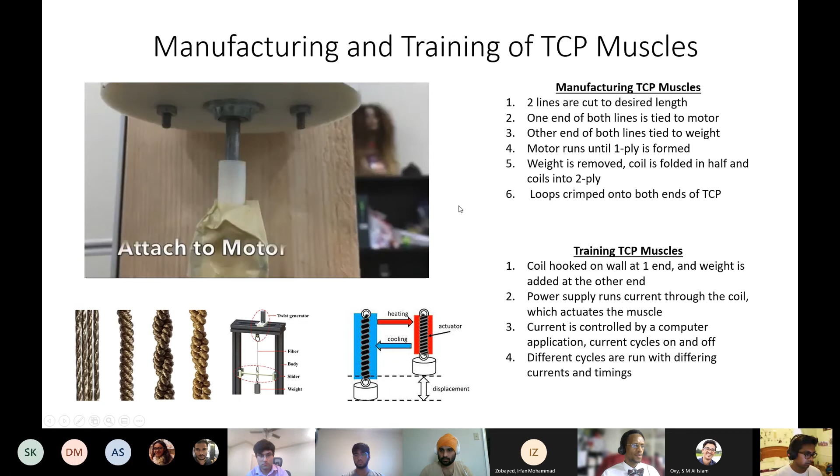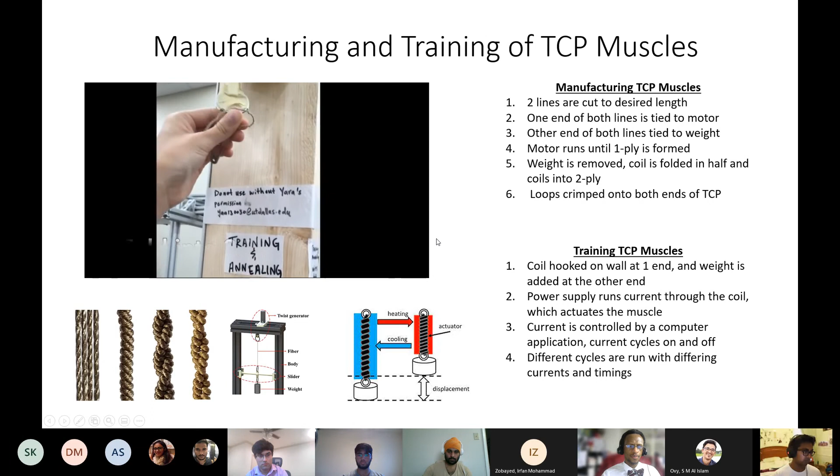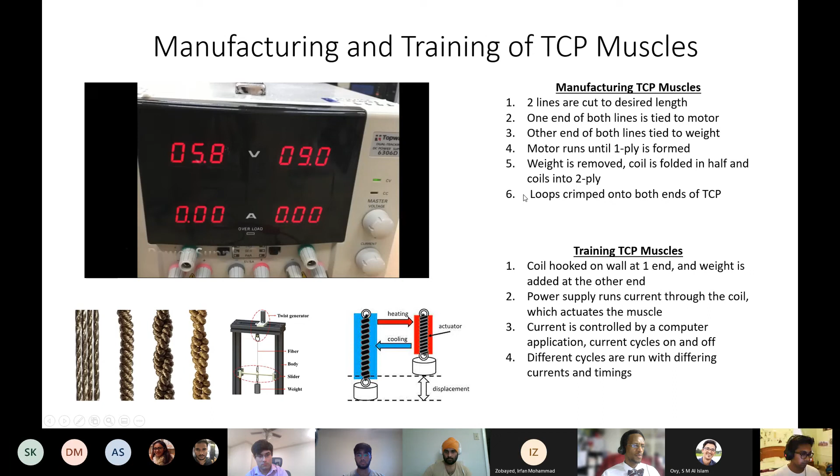So as the motor twists the wire, it makes that one-ply coil, and then here you can see that one ply is made into a two-ply by folding that, and then it is crimped into place. And then this part details the training of the coiled polymer.

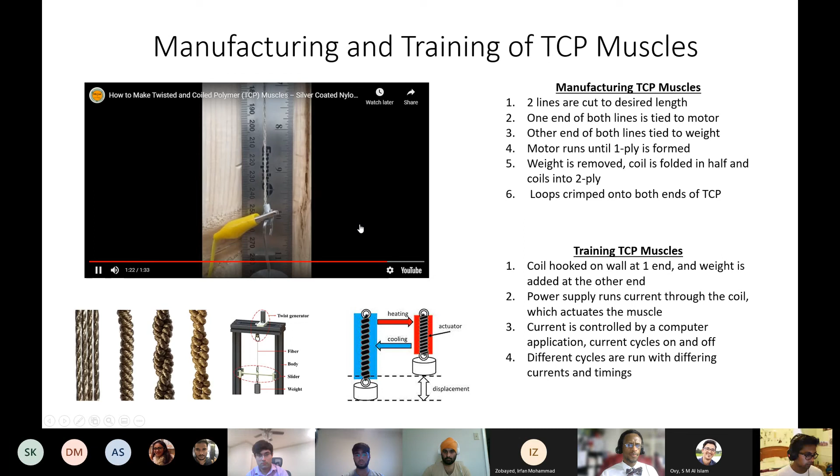And this video uses different voltages and currents, but the setup I'm familiar with used 4 different voltage, current, and timing settings, and that's a major difference from this video. So if that's all, are there any questions for me?

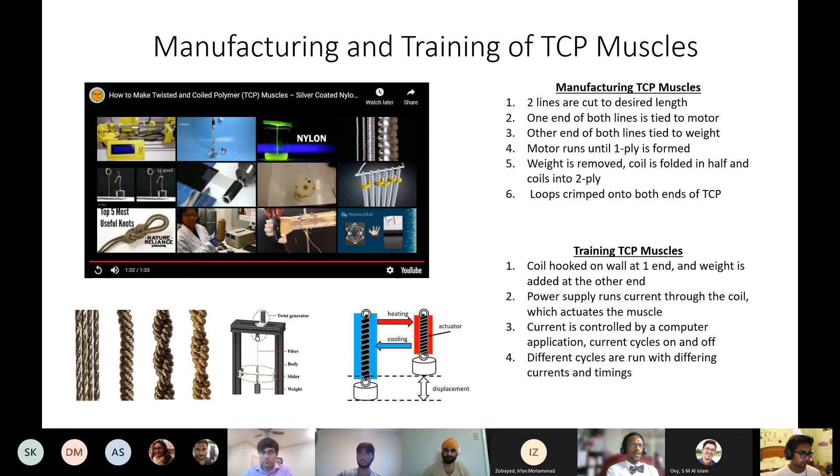What are the applications of TCP muscle apart from the iGrab, which you feel can be done in future? I think that this could be applied to any sort of actuation and replace motors in a lot of different circumstances. So I think it could be used to simulate muscle contraction in maybe prosthetics, for example.

And I think I've seen it used in the underwater robotics division as well. So I think there are a lot of applications to TCP muscles.

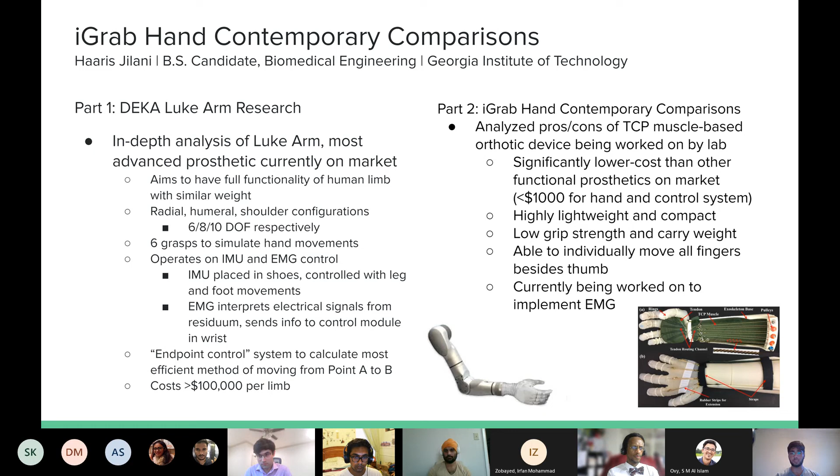And it's currently being worked on to implement EMG. Once this is implemented, the user will essentially be able to control the hand, as it will interpret electrical signals from the arm, and this will contribute to how easily it is able to be used by the user. So overall, the iGrab Hand sacrifices some functionality and power for accessibility and precision, and represents a much easier to access choice for amputees in a market that's often dominated by a couple large companies.

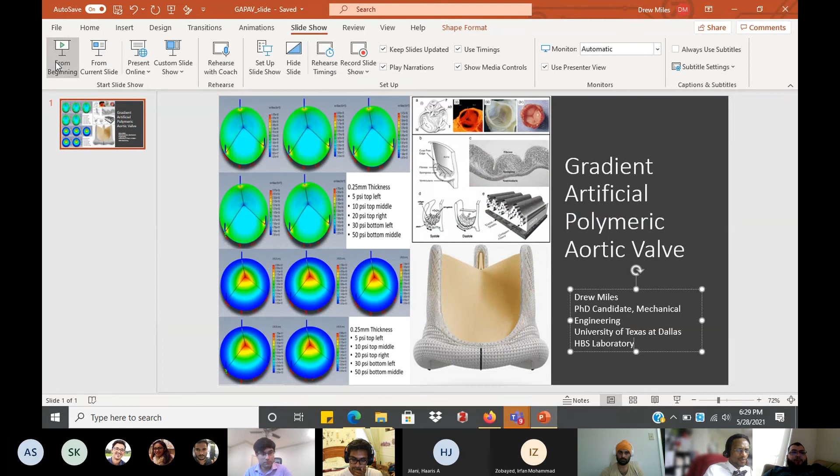So the simulation here, what we're doing is we're trying to determine at what thickness will we have the optimal response to the average pressures found in the human body. So although we went all the way up to 50, even though that never happens—if that happens inside the human body, you're dead—but we did that as a factor of safety.

And we're trying to make sure we want to get the right size of elastomer so that we don't have breakage or tearing of the valve, but that we also have full opening as much as we can get. We want the valves to fully open to not restrict the blood flow through the valve.

So we're tinkering and adjusting the different values to find the sweet spot of thickness, so that we have the correct thickness and correct angle relative to the valve—relative to the outer ring of the valve.

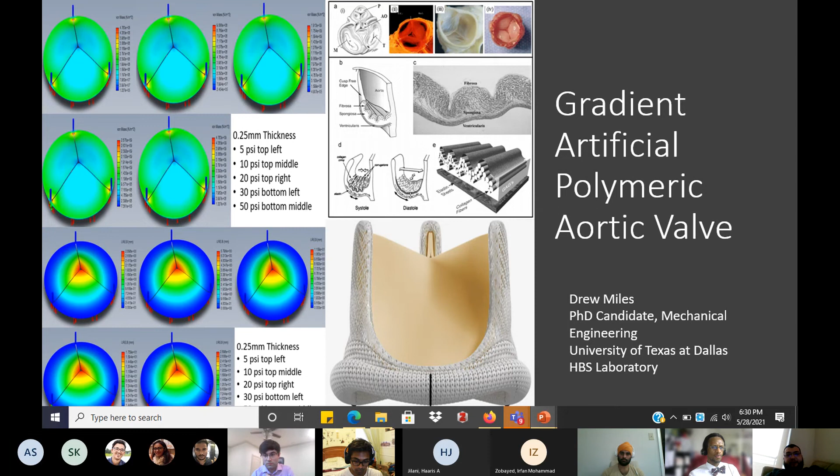Great, thanks. All right, so let's give a hand for applause to Drew. All right, so any questions? Quick question. I have one question.

Drew, what sort of muscles are you trying to use to actuate the valve? And then how much actuation strain optimally are you looking for?

Well, first of all, I don't know what the optimal strain percentage is—I don't remember that offhand. However, the other question I can answer very easily: we're actually not using active actuators, because that would require a power source. Natural valves have no way of manual activation—it's all passive activation due to the pressure differential.

So what we're wanting is just a material that can be trained to respond specifically to certain pressures. We're investigating whether that might be some type of smart material, or just a polymer with certain properties that we've added. It's all being investigated, but at the end of the day, we don't want any kind of actuation that's going to require any kind of power source.

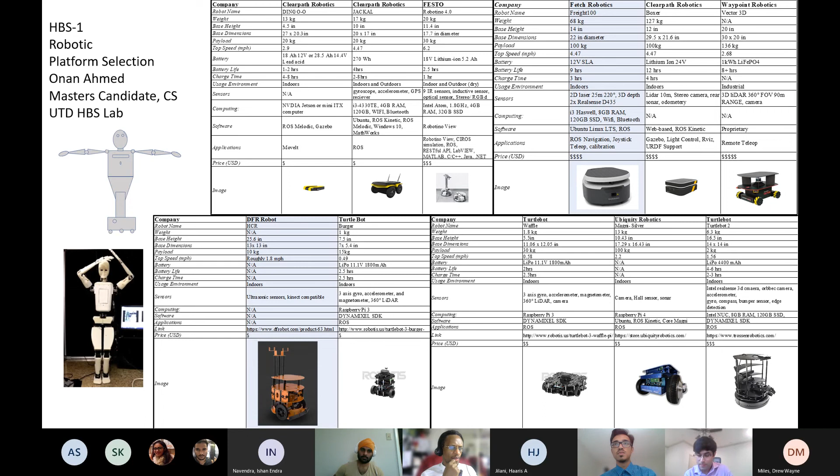Great, thanks, Onan. So let's give it up, let's give the hands for applause and move to the next. Next is Abhishek Singh.

Hello everyone. So I have been working, I'll share my screen first. I'm spotlighting everyone presenting, the presenters, so we'll see them. Can you see them magnified? Presenters? No, sir. Okay, maybe it's only for me. Okay, go ahead.

So I have been working on development of the social assistive robot that Onan also just talked about briefly. Can you make it full screen, please? Is it not full screen yet? Not yet, I think. Is it now? Hold on, not yet. Abhishek, you have to share your screen, I think. You have shared the presentation only, probably. Oh, it is shared, it is shared, but I'll share it again, okay.

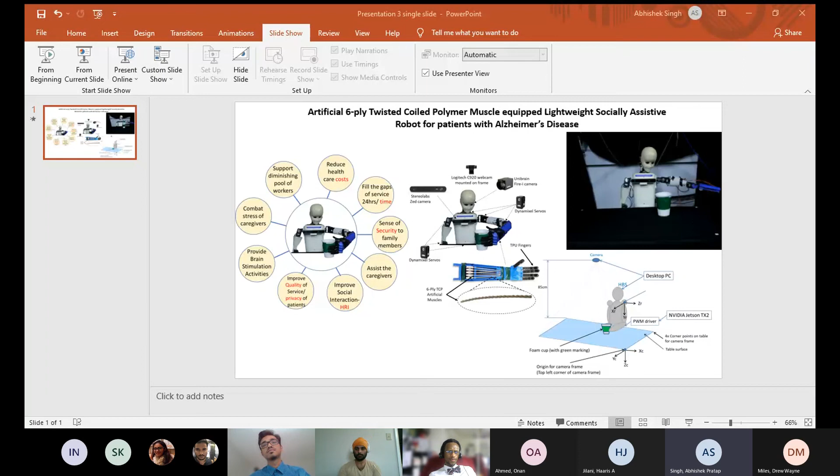So currently, you can see the robot just grabbed the cup from one spot and placed it at a different desired target position. So how this robot works is, currently it uses a traditional computer vision system in which it differentiates red, green, and blue color. So currently in our program, we just painted the cup green, marked as a green object, and then it grabs a picture from the camera mounted on the frame.

It's a Logitech camera, and then it calculates the centroid of that area of the green color, and then tells the robot where the cup is located, and then uses inverse kinematic equations to reach the cup, grab it, and then place it at the desired location.

So currently, the way this is set up is not fully automated. We have to trigger the grabbing action manually using the 6-ply as it is connected to the PWM driver through NVIDIA Jetson. So in the future, our goal is to make it fully automated, use machine learning techniques as well, and make it into a mobile platform, so it is more useful, as Onan had mentioned before. So that's the current situation of this robot.

Great. Okay, a quick question for Abhishek. We've been discussing this at least twice every week to complete this paper. But the application is great. So this Alzheimer, or assisting as a socially assistive robot, SAR. So one thing is that 6-ply, we have one publication on 6-ply for jellyfish, but not for other robotic applications. You guys may have to look at Armita's paper, because that's the only one we have regarding 6-ply publication. I checked yesterday. Yes, sir. All right. Yes, sir. Okay.

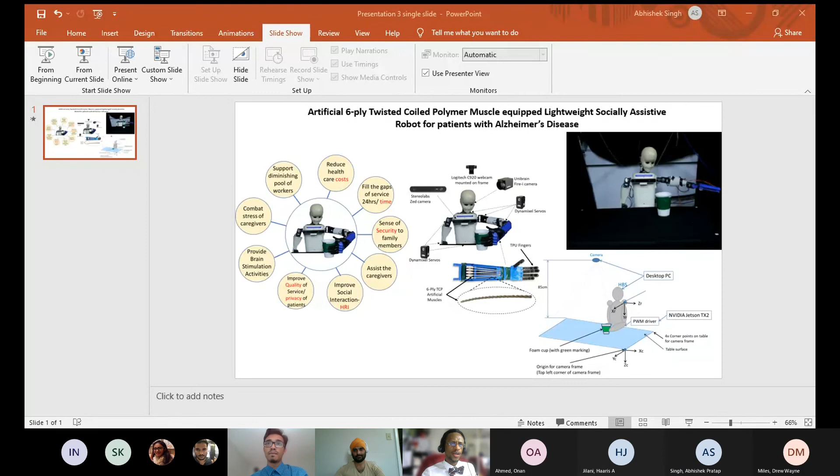So let's go to the next. Let's give an applause to Abhishek. Thank you. And thanks, Abhishek. Let's move to the next. So we have Ovi now.

Let's change direction a little, to 3D printing. All the research we've been doing is related. For example, the social robot is entirely 3D printed, most of the parts except a few components. And this robot Abhishek showed, and Onan, is unique because it's printed at the size of a 7-year-old kid. That's so big. You know, most 3D printed robots are very small. So we are talking about an adolescent size robot.

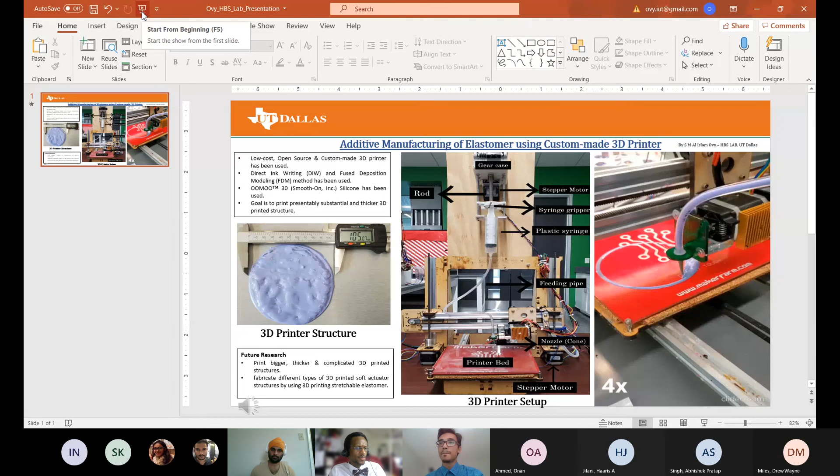Okay, so Ovi, it's your territory now. Professor, Irfan told me that it should be 2 minutes, so I've already recorded one. Yeah. So I'm gonna just share that one. Okay, thank you. Can everyone see? Yep. Did you share the audio option? Yes, Professor.

Hi, I am S M Al Islam Ovy. I am a PhD student at the Mechanical Engineering Department of UT Dallas, and I am working at HBS lab under the supervision of Dr. Yonas Tadesse. My research topic is additive manufacturing of elastomer using a custom-made 3D printer in soft robotics. We all know that additive manufacturing of soft materials such as elastomer has received substantial scientific and industrial interest in recent years because of their use in soft robotics, low material compliance, and material properties.

So here we can see this is our 3D printer setup. In my research, a low-cost, custom-made and open-source 3D printer is being used to print a highly stretchable elastomer that has adequate tensile strength and can also be fabricated to build an actuator. And by using the custom-made 3D printer and elastomer with different mechanical properties, a substantial and thicker 3D printed structure has been printed in our research.

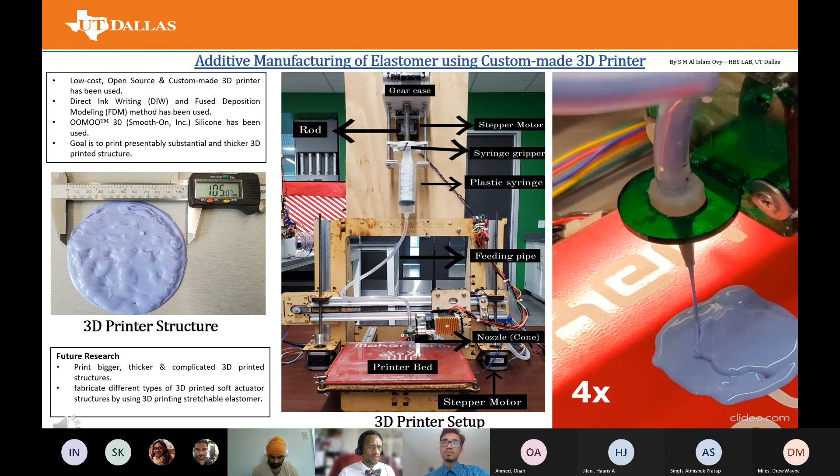We tried to scale our structure gradually from smaller to bigger to investigate the strength and strain of the printed structure. Meanwhile, temperature was also varied to reduce the curing time for the 3D structure. Here, this is the biggest 3D printed structure we have printed so far. Moreover, we are trying to develop a functional method for additive manufacturing of soft robotics 3D structures. So our future goal is to print bigger, thicker, and more complicated 3D printed structures. For that, we need a larger heating bed, and we also want to fabricate different types of 3D printed soft actuator structures using 3D printed stretchable elastomer.

Okay, so that's all I have, and we have done my research by using our hands. So the thing is, we need to purchase a gear set to do this automatically. The syringe, to be clear, right? The syringe, yes, that syringe support part you did by supporting manually. Yes. Great. I like the quality of the video. The one that's printed, the illustration is great, and 100mm size printing is one good thing. So overall, that's a great activity.

Thank you, Professor. Quick question. I have one question, sir. Hi, Ovi. How easy or how difficult is it for you to 3D print different dilutions of silicone? Like if it is quite diluted, how easy or how hard, or if it is much thicker, how easy or how hard it is?

So the viscosity plays a big role here. If it is less viscous, it prints really easily. But sometimes it pours a lot of material, and that creates a problem in your structure. So it's just a trial and error method, in my opinion. You keep mixing silicon thinner, and you will find which one is optimum for your research. All right.

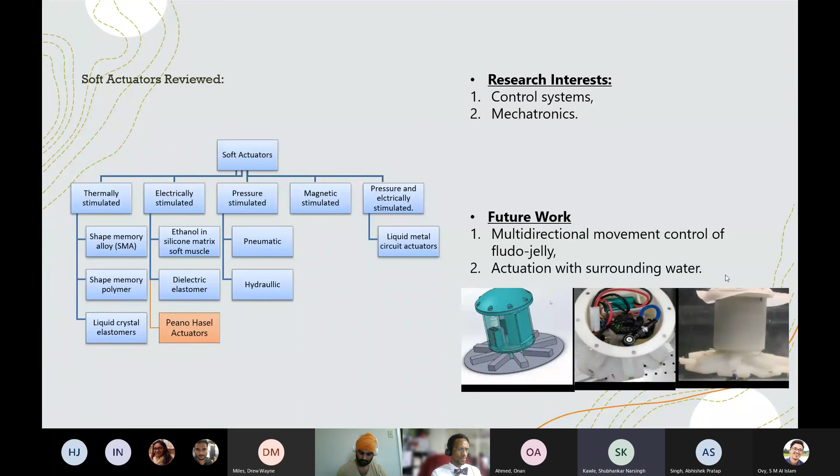Great. Can you share back to this slide? I think look up ethanol in silicone and electrically stimulated soft actuators in your graph. Yes, sir. Look up those. That's good. Also, we haven't looked so far at shape memory polymer. We are free to use any of the actuators, as long as we get good results. Yes, sir. Can you see it? Yeah, I can see that.

All right. So yellow is your favorite color? No, no, it's nothing like that. I'm just looking based on your first slide. It's just a coincidence, right?

Okay. Any other question or comments for Shubhankar? I think you have looked at so much interesting literature this semester, very interesting publications. You can also use those for future demonstration of your activities. So many nice publications from Science, Nature, and Smart Materials and Structures. There is another paper in Smart Materials and Structures using some kind of vapor to actuate. I saw it yesterday, so you may have to look at that. I think it's published already. Any comments, questions?

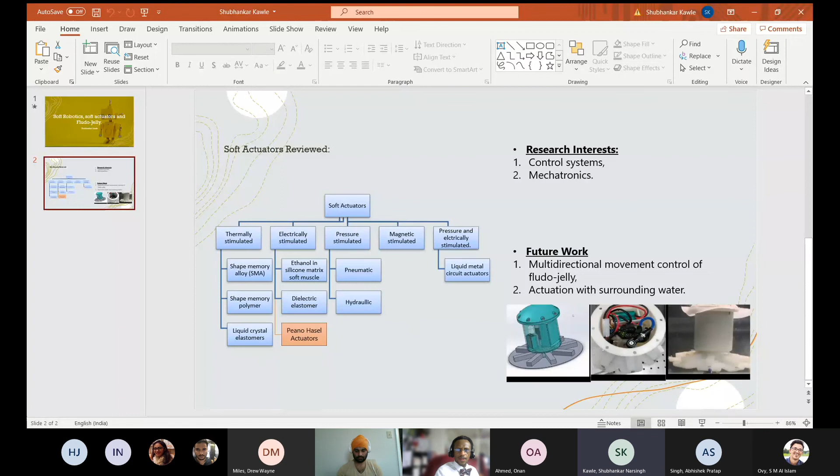All right, let's give hands for Shubhankar and move to the next. Dorsa is not here, Natalie is not here too. So Sanjana, I think, is next. We have four more presentations. Hello, sir. Yes. I'll just start presenting. All right.

Okay, can you see my presentation? Yeah. Hi, I'm Sanjana. Can you remove me? My picture is on your slide. Actually, yeah. Okay. Can you still hear me? Yeah.

So hi, I'm Sanjana and I'm a master's student from the Biomedical Engineering Department, and I'm working with Professor Tadesse in the HBS lab. Currently, I'm working on two major projects, one for the iGrab hand and one for the underwater robots. I'm working on the sensor components of both robotic systems. The first one is the underwater robot, where you can see on the left side the circuit for the underwater robot.

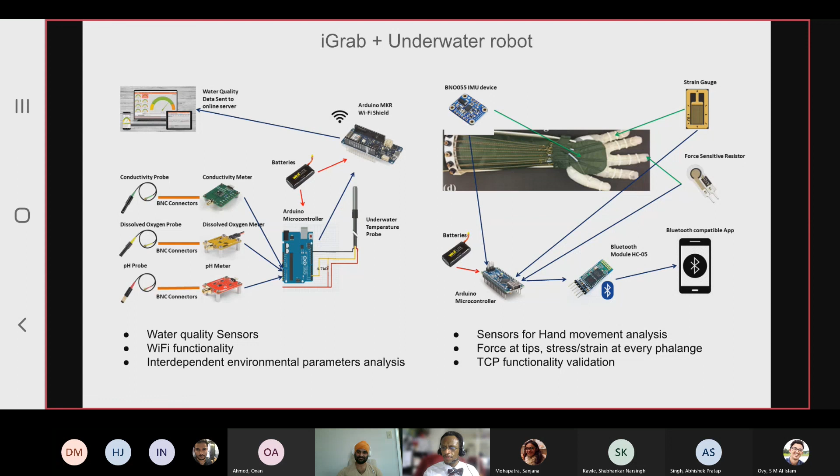Thanks, Sanjana. Great. That's a good question too. So thank you both, Sanjana and Pawandeep. All right, let's give hands for Sanjana and move to the next. Let's give it up. Ripudaman. I don't see Ripudaman here. Professor, he's not here. Okay. He's probably stuck somewhere, so we will have to skip him. So let's go to Akash.

Hello everyone, my name is Akash. Let me just share my screen. Is it visible? Yeah. Good evening everyone, I'm a graduate student in the Department of Mechanical Engineering at UT Dallas, working on an underwater soft robotics project under Professor Tadesse and Pawandeep. Basically we are trying to develop a robot that can operate underwater without any mechanical actuation.

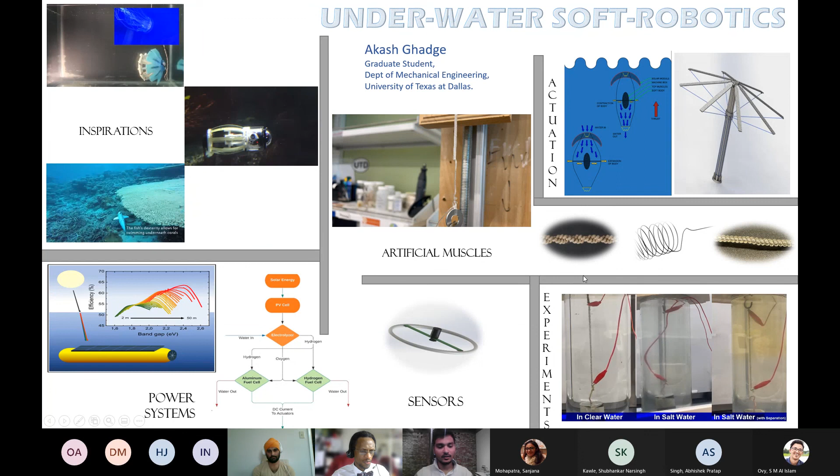Thank you. Great. Wonderful. Quick question now. Yeah, Professor. Anyone? I think that's a great summary that you gave, Akash. I have one question, sir.

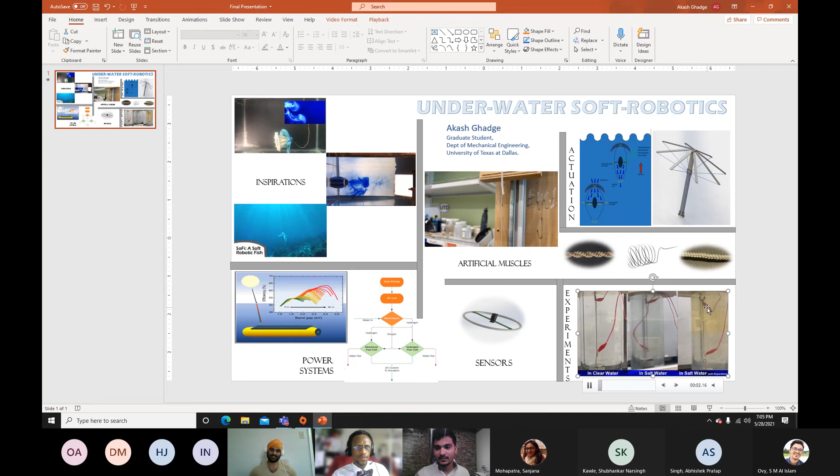Yes, go ahead. Okay, Akash, what do you think if we use salt water rather than normal tap water for the swimming actuation using the fishing line? How will it work? Yeah, we have tried that a couple of weeks ago. In the experiment you can see on the right corner side there is salt water. Now the salt water is conductive and...

Sorry, Akash. If you can just make it full screen and show the video. Yeah, that would be good. Just a second. Okay. Yes, just bring it forward.

So we have clear water, then salt water. I think in this setup, the wires were connected directly to the weight, and the weight is a pure metal. So it started the electrolysis of the water at a very high rate, and thus the current was lost and was not conducted through the muscle. Thus the actuation was very minimal.

Then we separated the weight from the muscle in the third setup. This kind of helped because of the separation the metal was not helping in the electrolysis, but still the current was passing through the water and electrolysis was happening, and because of the bypassing of the current, the actuation was not as good as the actuation in distilled water. I see. Thanks, Akash.

Just to add to it, Professor, when we used salt water, what we actually observed was that the voltage decreased a lot. A certain amount of input current had to be increased in order to get the same sort of actuation. But then the voltage decreased a lot.

I see. So this is what is happening. The current that's supposed to go to the actuator is going to the solution. So we are losing that current. That's why the resistive heating is less in this situation. So probably we may have to encapsulate the actuator separately from the surrounding somehow. That way we'll isolate it when it is operating in salt water. But that's a great side by side comparison, which is really nice. I'm seeing it for the first time, so that's good.

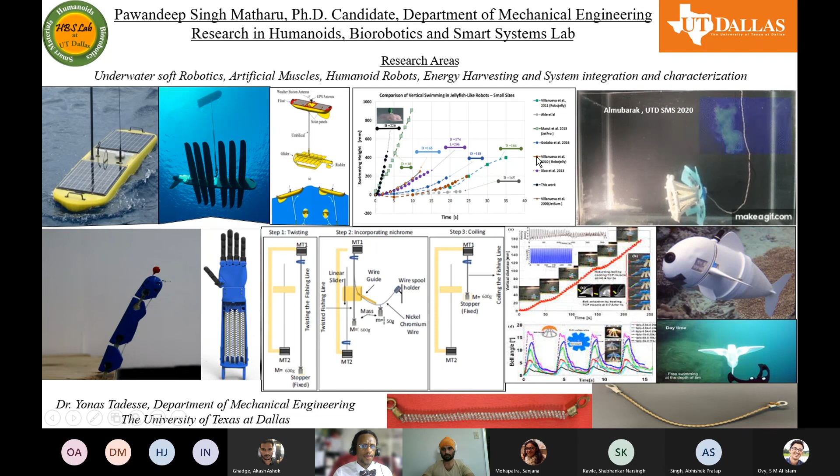Great. That's wonderful. Wonderful summary, Pawandeep, about underwater robots and robotic hands. Any quick question for Pawandeep? Which robots do you appreciate the most so far from the literature among all the soft robots? I know it's a very hard comparison because each robot has a unique feature. But just as an opinion.

I would say that I would choose two robots. One is from our own lab, that is the Fludo-Jelly. I don't know why, just the speed probably. The Fludo-Jelly, and number two is SoFi, because SoFi is so well manufactured and fabricated. Actually we are trying to do that. We are trying to make a robot of similar design which can be manufactured over and over again. I think SoFi can be done like that. So these are the two robots.

Yeah, I think it's autonomy also, the powering unit, electronics, and swimming, biomimicry. So many things are in that. So many things are there. Yeah, great. Thanks, Pawandeep. Thank you, Professor.

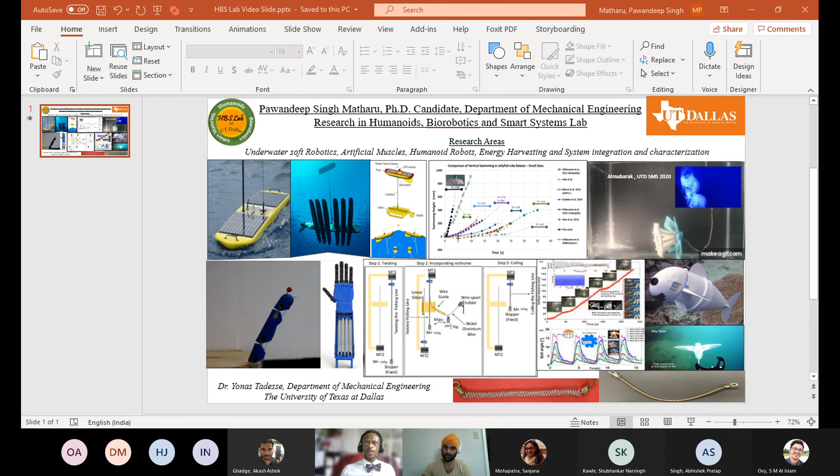Thank you. Last call. Anyone missing? Last call. So that's what you see in a bar, right? So by the time it's going to close. I think everybody presented here. So

Thank you so much. Finally, I would like to say thank you so much, everyone, for making this happen and for the nice summaries that you gave. I'm so proud of each of you for your contribution to the HBS lab and for yourself. So we'll continue our activity so that we go to the bottom of this, solving the fundamental problems in robotics, so that people can use it for healthcare, education, military, and also other applications.